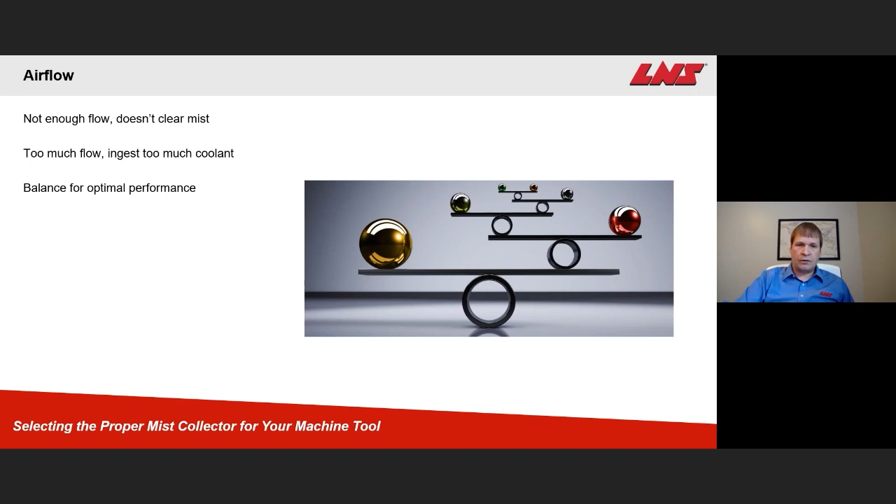Mist collector selection is based on cabin size. Industry guidelines recommend refreshing the cabin 4 to 6 times per minute. You can go a little less on lighter applications and a little more on extreme applications, like high pressure coolant or anything that generates a lot of mist. You can also decrease that number as the cabin size increases.

Please see below for an example on a large machining center. If we have a cabin that is 20 feet by 10 feet by 6 feet, we reduce that number by 20% to accommodate for the spindle, giving us 960 cubic feet of cabin volume. So 960 times a refresh rate of 2 gives you 1920 cubic feet per minute airflow requirement. With 1920 CFM, that leads us to our WM 2500 mist collector.

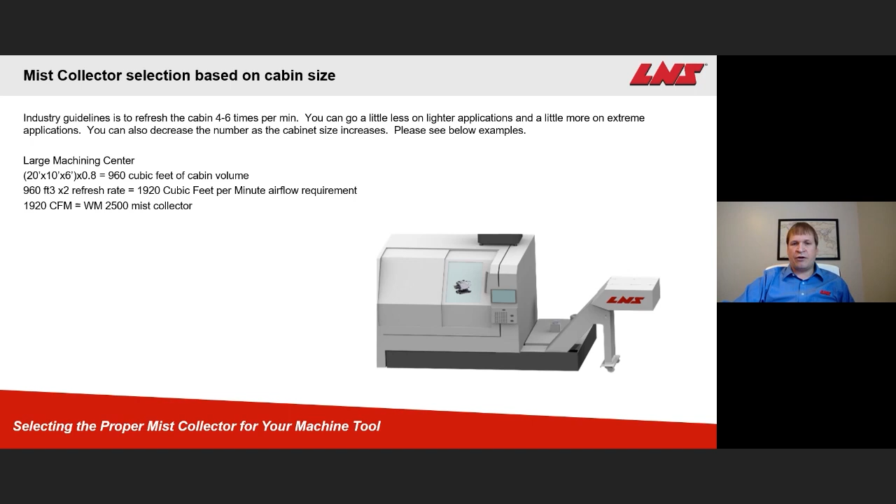Our Fox WM series has 3 sizes, ranging from 2350 CFM all the way up to 7050 CFM. We have our single WM 2500, our double unit, the WM 5000, and our triple unit, the WM 7500.

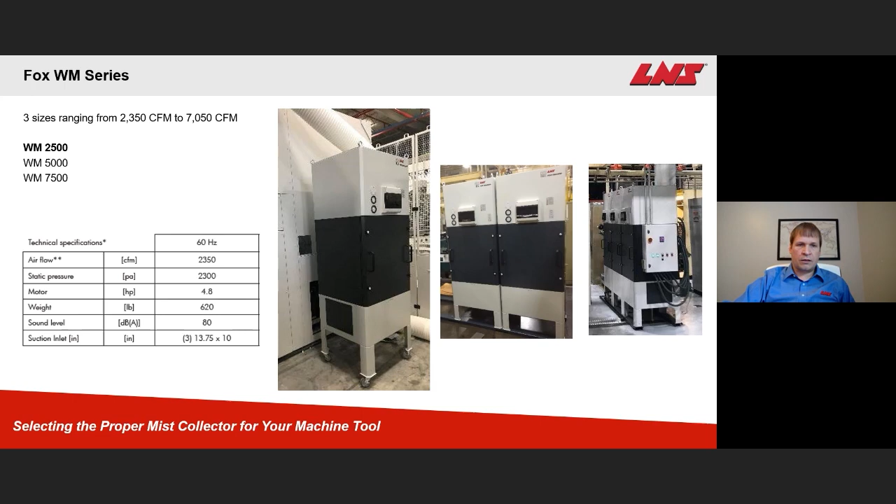Each WM 2500 is a 2 or 3 stage system. We have a pre-filter, which filters out your large particles at the bottom, and then your main filter, which filters out medium to small size particles. After that, you get 99% clean air. You can also add an optional HEPA filter, which will get you to 99.95% clean air.

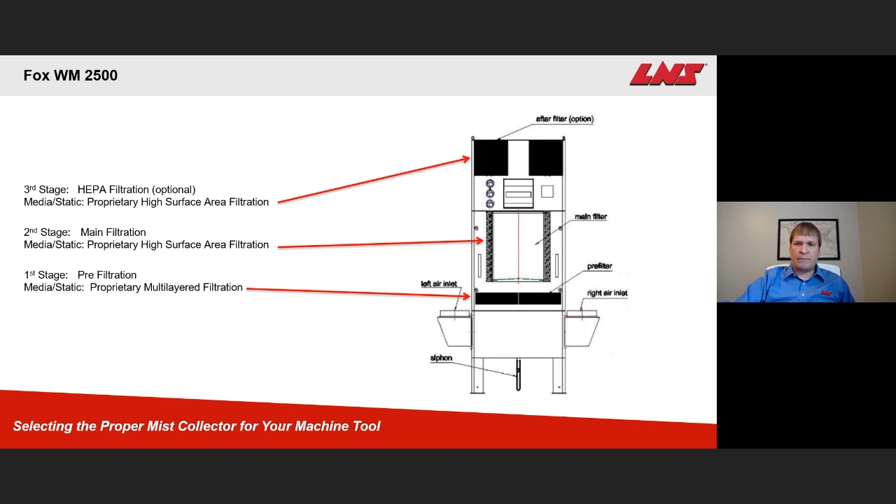Each WM has a pressure gauge to monitor each filter stage. As the pressure drop increases, this indicates that the filters are getting more contaminated. We have left, right, and rear inlets, and a front filter access panel to easily change your filters within 10 minutes.

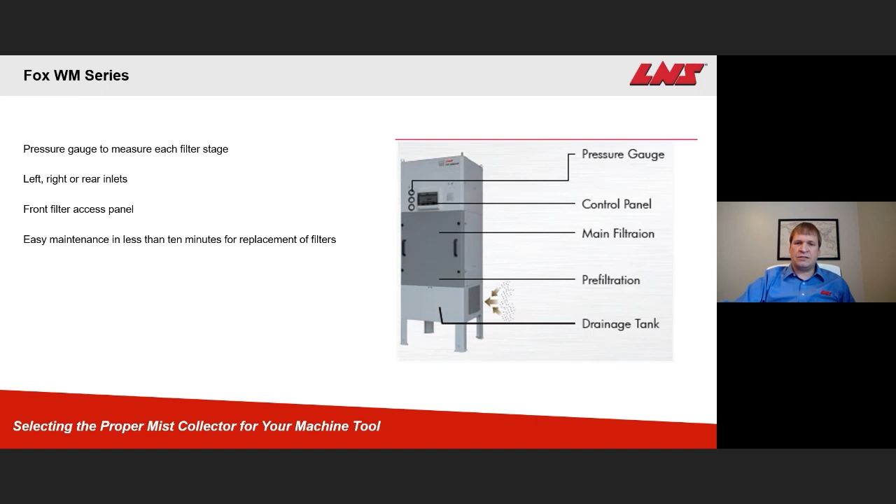So let's do another example on a smaller lathe. Again, industry guidelines are to refresh the cabin 4 to 6 times per minute. If we have a lathe with a cabin size of 6 feet by 3 feet by 4 feet, again we take out 20% of that to accommodate for the turret, giving you 58 cubic feet of cabin volume.

We're going to use a refresh rate of 5 this time, since it's a smaller cabin, which gives you 290 cubic feet per minute as your airflow requirement. 290 CFM leads us towards our WS2 330 mist collector.

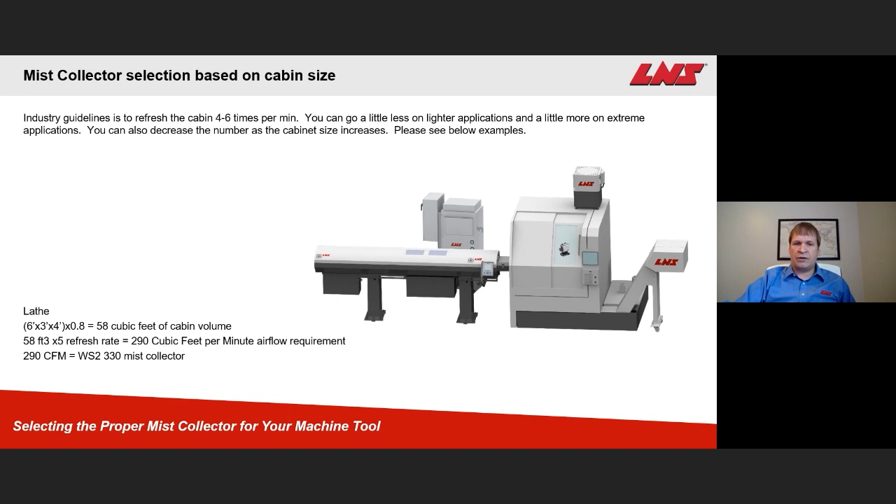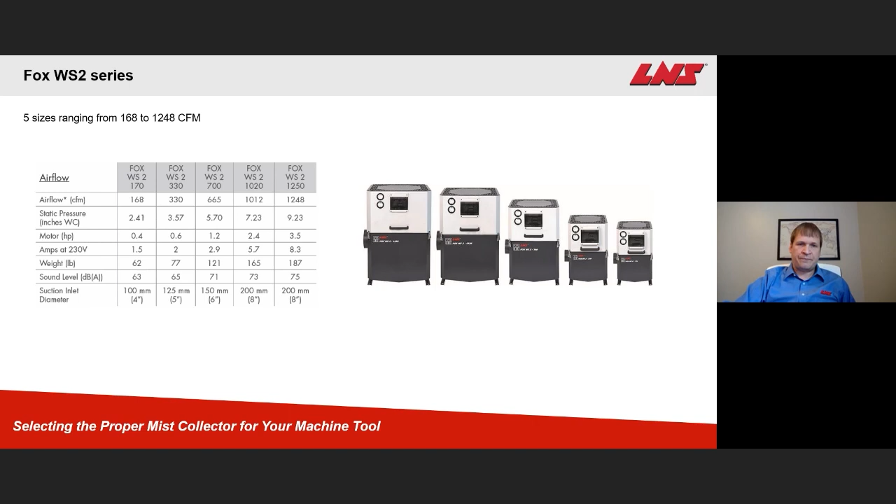Our Fox WS2 series has 5 sizes, ranging from 168 CFM to 1248 CFM. Our WS2 series is a 3 or 4 stage filtration system.

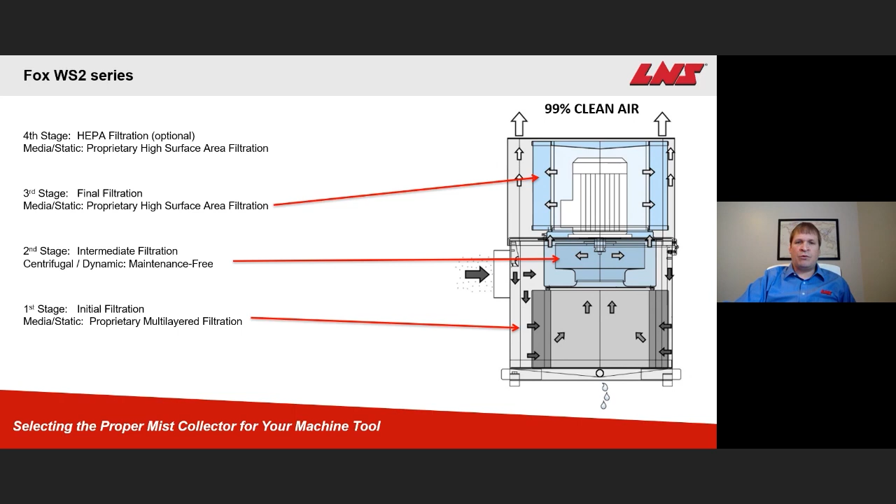Again, the pre-filter is at the bottom, filtering out your larger particles. Then we have a second, maintenance-free centrifuge stage, which spins out some of the smaller particles into larger particles that fall out. Our third stage is the main filter, producing 99% clean air. We also have an option for a HEPA filter on top of the mist collector, giving you 99.95% clean air.

Each of the WS2 mist collectors has a differential pressure gauge to monitor each filter stage. We also have a motor starter to protect the motor from current overloads. We have dual inlets to provide flexibility for mounting, and the V-shaped bottom helps promote drainage.

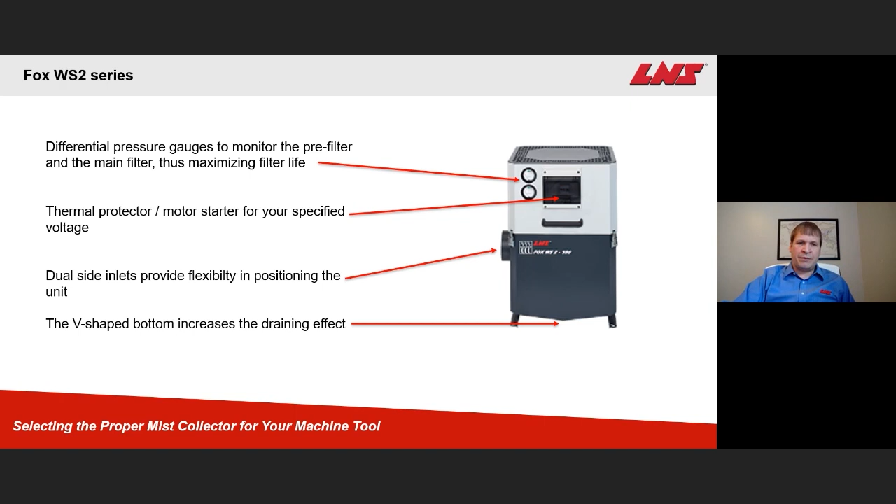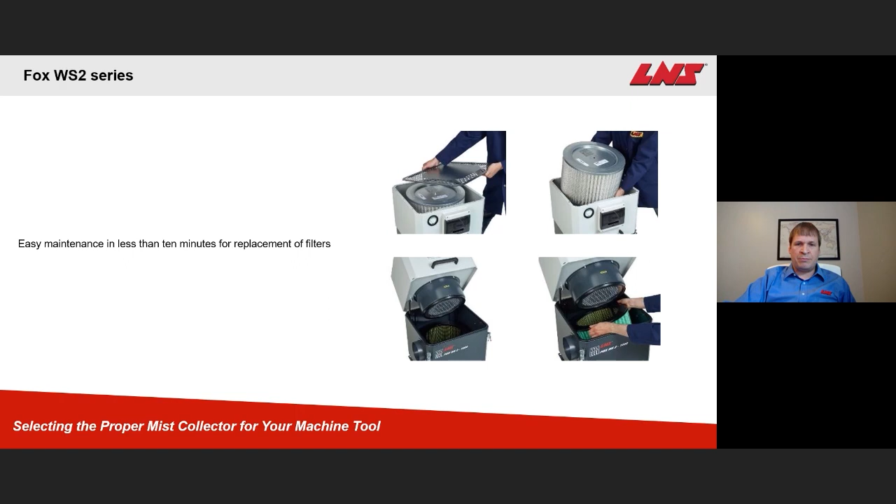We have easy maintenance within 10 minutes for changing the bottom pre-filter and the top main filter. Next, on to filter selection.

We have two different types of filters that will work based on your machining needs and the coolant you select. Emulsion filters will only work with water-soluble coolants, and there is a visible difference between the emulsion filter and the oil filter. The oil filter is designed to perform in oil applications.

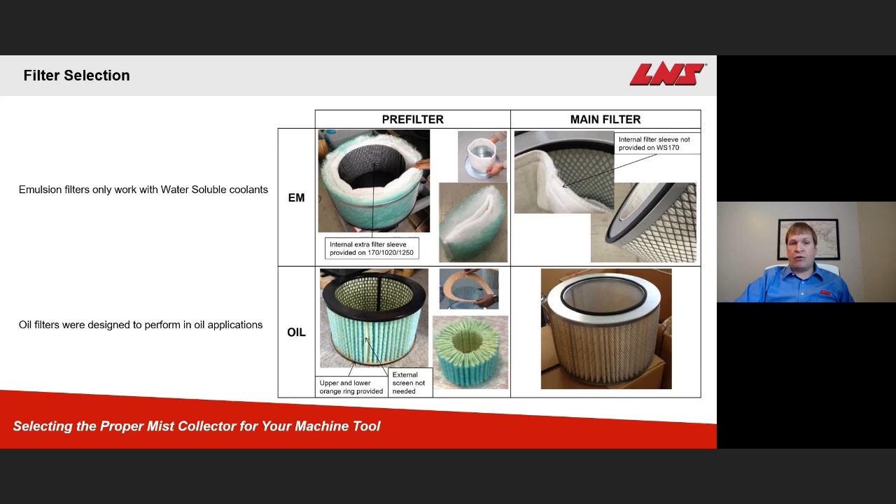We have 5 different mounting options to provide you with the best mounting option for your facility and layout. We have an option to mount on top of an LNS ChipBLASTER high pressure coolant system, a vertical stand, a machine top mount, a mount for your LNS Turbo Chip conveyor, and a stand on wheels.

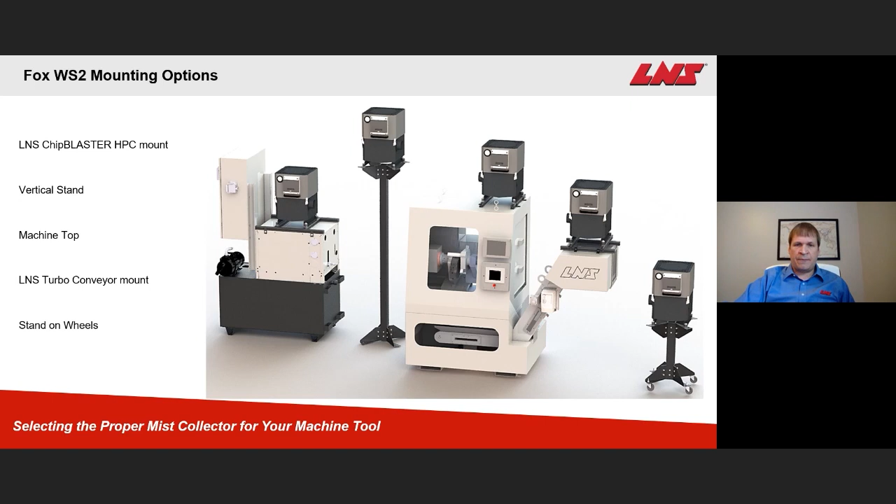A few performance tips to ensure your mist collector runs at optimal performance. Ensure that you have a proper P-trap. The absence of a trap on the drainage tube and the lack of preloading the P-trap prevents collected liquids from being evacuated from the unit. You get back pressure in the system and the mist collector just fills up with liquid instead of draining. The lifespan of the filters could be seriously jeopardized by continuous use of the unit if the drainage trap is not created.

There are a few different ways you can create a P-trap. You can create a 6-inch loop that is 6 inches down from the mist collector, or you can create a 6-inch S-trap with the P-trap bracket that we provide in our installation kit.

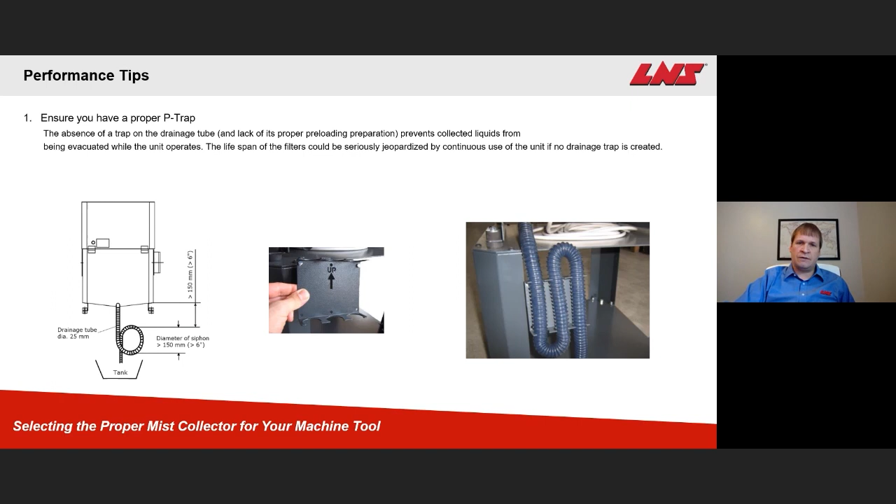Another installation issue we run across once in a while is having droops in the inlet hose. Having droops in your flex hose allows coolant to collect in the low point, and over time that will choke off your airflow and your mist collector won't be able to clear the mist.

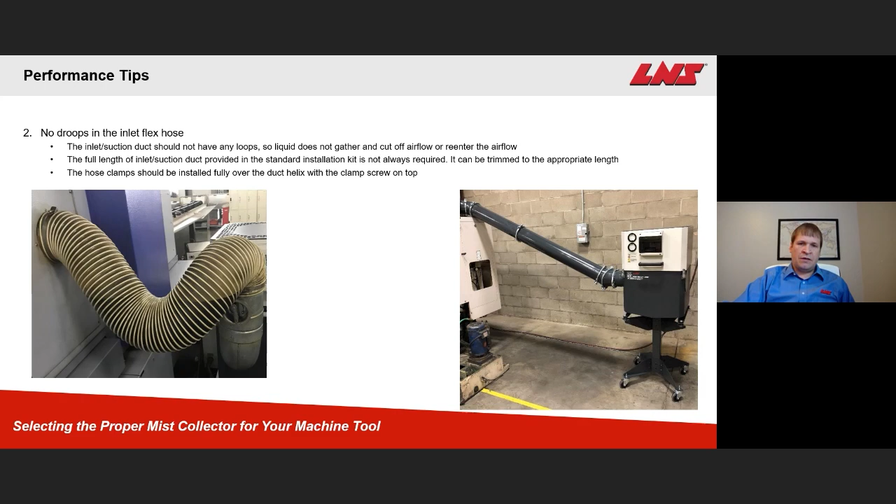We supply the full length of inlet duct for each mist collector, but that can be trimmed back to the size for your particular application. One other point is to have the clamp facing up, which will help seal the hose in the best possible manner to avoid leaking. If you have a long stretch of hose, we also have hard pipe kits that can be used for those long stretches.

Something else that will help performance is to install the inlet port as far away from the spindle as possible. That's not always possible, but if you have the option, install it as far away from the spindle as possible. This reduces the amount of bulk fluid getting sucked into the mist collector, and also draws the mist away from the door when the operator opens it. Installing a splash guard will reduce the amount of bulk fluid entering the airstream, as well as prevent chips from entering the mist collector.

Adding an airflow regulator will help fine-tune the mist collector airflow for that particular application, which can help optimize filter life.

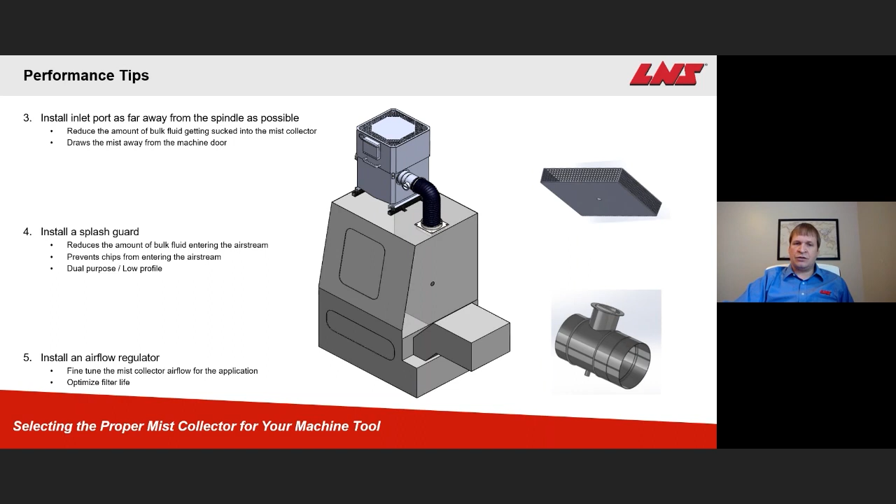Something else that will help improve the longevity of your mist collector is to turn it off when the machine tool is not in use. Changing the pre-filter more often than the main filter can extend the life of the main filter. Wipe out the mist collector cabinet with each main filter change and inspect the drain line for blockage. If there are any chips in the way, this could prevent the liquid from draining out of your system.

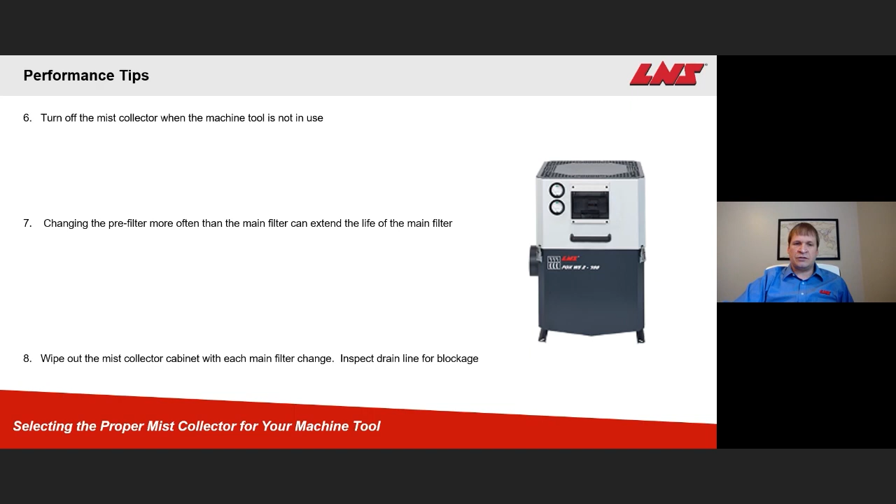We have over 15,000 air filtration systems installed worldwide, and we also have a mist collector matrix developed with over 60 OEMs to help with your mist collector selection. Feel free to reach out to myself or your regional sales manager to help with sizing the mist collector for your particular machine.

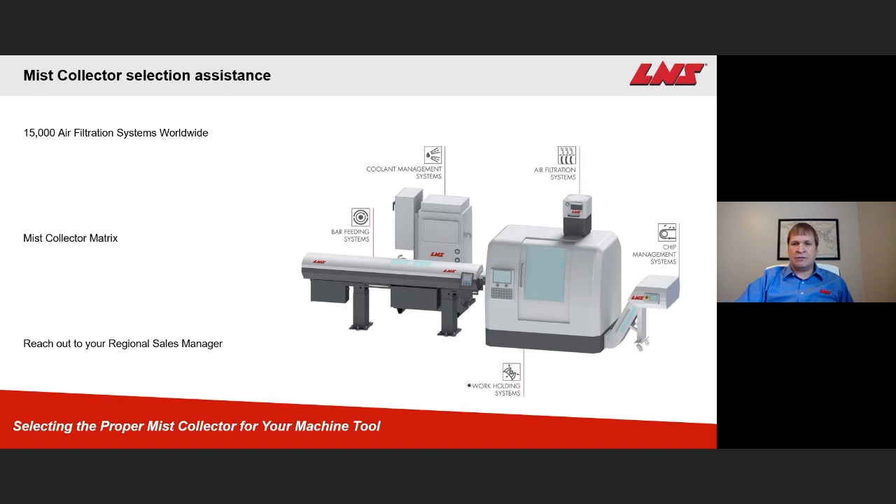And now I'd like to open it up for questions. Brandon, do you have any questions that we could answer?

We don't have any questions that we can answer at the moment.